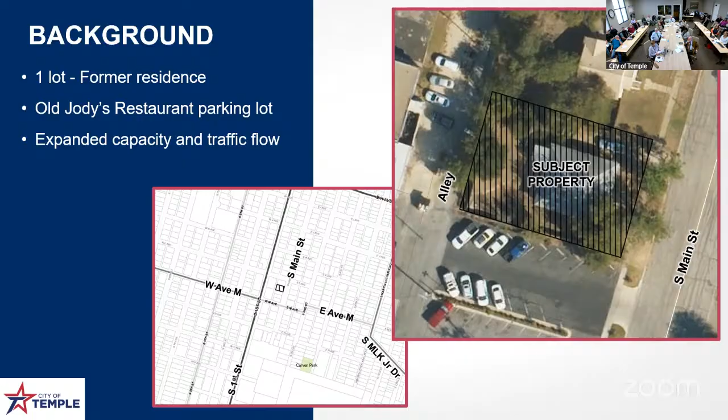They are planning to enhance their parking in this location. As you can see, the Old Jody's restaurant is to the left of the page, and all the parking is there. This will expand capacity. Currently they have 39 spaces. This will add an additional 15 spaces, so with restriping there will be a new total of 53 spaces.

They also show some internal circulation so people won't have to come out into the public roadway onto South Main Street. With the new parking area shown at the top of the screen, those green areas at the top and bottom are the landscape areas, which comply with the TMED standards as well as what they have been doing.

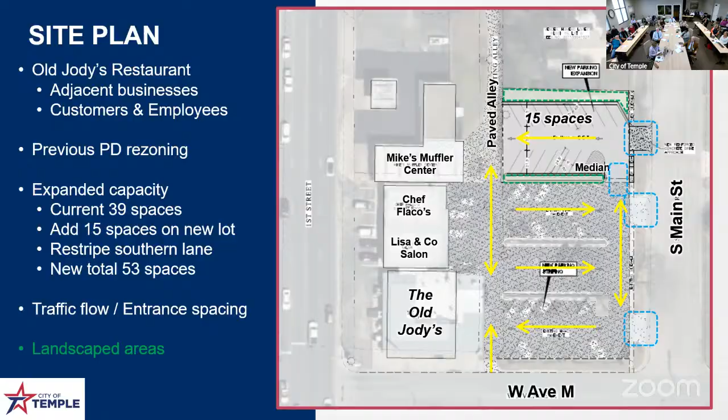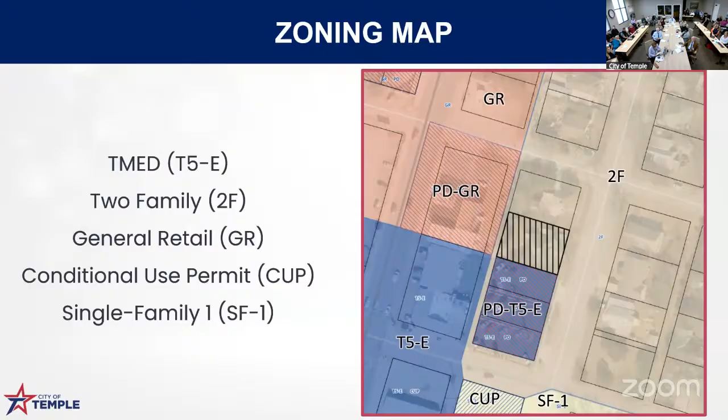Here is the zoning in the area. You currently have the TMED zoning for the parking, as well as the Old Jody's restaurant. You have PD general retail within this area, a conditional use permit, and some single family zones. This proposed zoning will be the exact same as what is directly south of it.

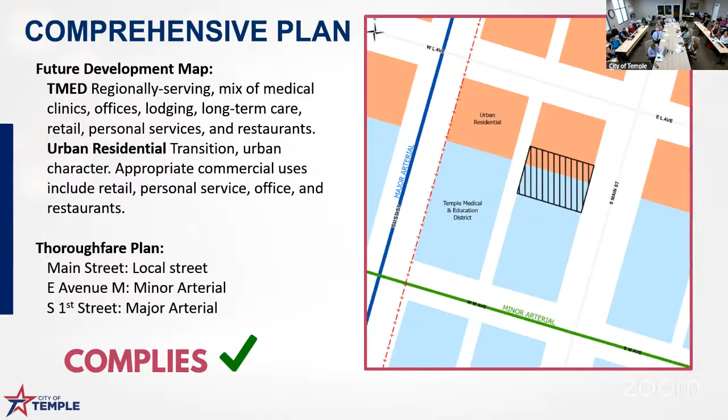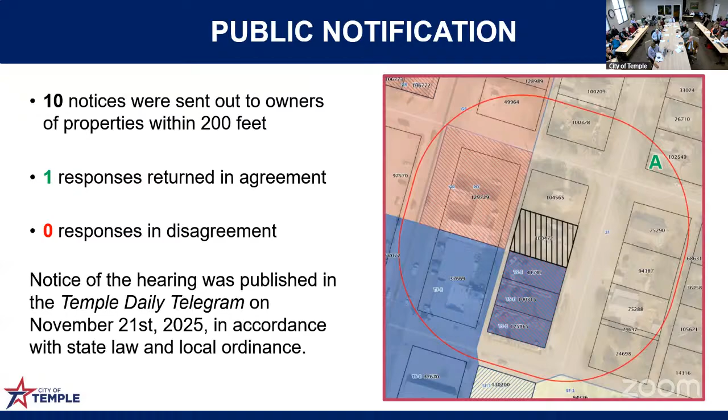Council? Good, thank you, ma'am.

Moving on to item 2 is to discuss the building concerns at Sammons Community Center and the Summit Recreation Center.

Good afternoon, everyone. To give you an update on the Sammons Community Center as to where we stand, this is a building that's currently closed. I want to give you an update as to where we're at with regards to moving forward. So just to give you a little history of this building, it was originally constructed back in 1921.

The blue dashed lines in the bottom half show the original structure. Since its construction in 1921, it was added on many times, and they basically left the original roofs as they added on to it. So there's a lot of weight on that building overall. In May of 2024, we had high winds hit our area, tornadoes, but not tornadic winds in this area per se, though it did damage the shingles on the roof.

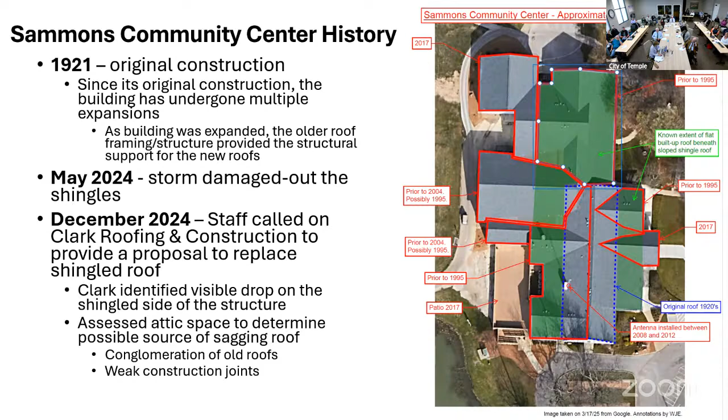So staff's response to this in January 2025 was we contacted Wiss, Janney, Elstner, referred to as WJE. They specialize in forensic engineering. They have a lot of PhDs, and they're the ones who do research to figure out why things happen, not necessarily designing new things, but why did things fail and so forth.

It took a little bit to get them engaged and on site because of our processes. But last March, we had a lot of high winds. So in talking with Kevin Beavers and others, we made a staff recommendation to close that facility until the structural assessment could be complete. WJE completed their assessment on site on March 17th, and when they left that day, they said, we agree with your assessment—this facility needs to stay closed until you can make the necessary repairs.

But we didn't receive their final report until May 13th, 2025. At that point I asked, can we engage you to design the improvements? But that's not their expertise, especially if we're talking about tearing off a roof and putting it back. They'll help make repairs, but not necessarily a major renovation to part of the building.

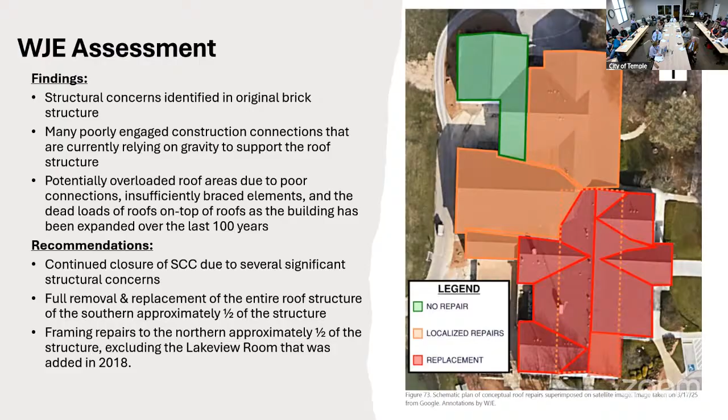Their recommendation was to continue closure of the center for safety reasons and structural concerns, and to fully remove and replace the entire roof structure on the south side, designated by the dark red portion on the bottom. That means opening the whole thing up, not just taking off shingles—you could look down inside that building. Then there are localized repairs needed in the orangey area at the top, and basically no repairs where you see the green, which was the latest addition we did back in 2018.

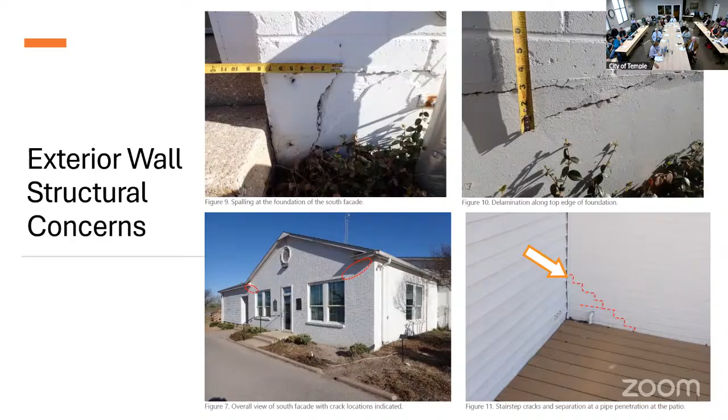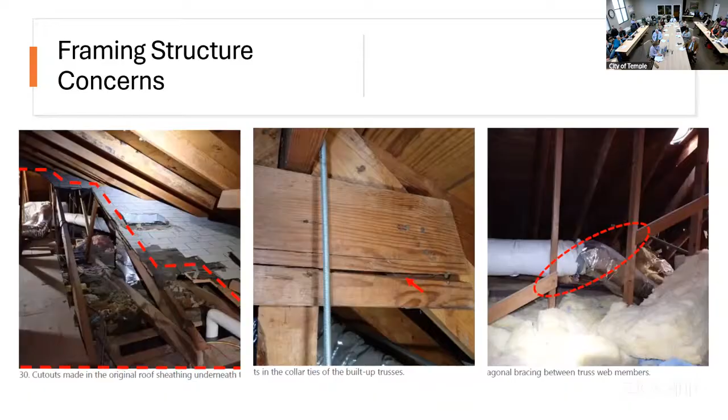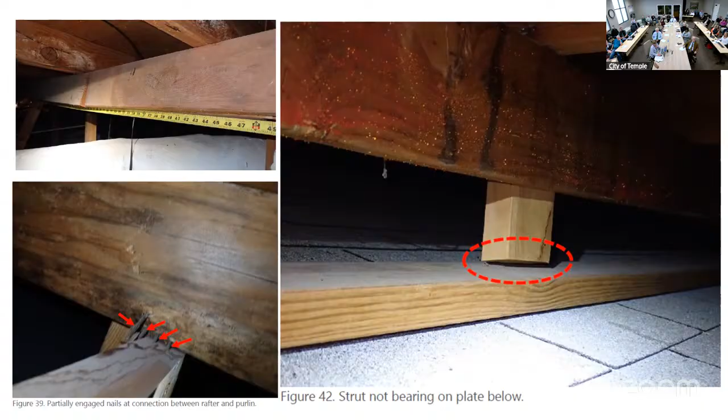Inside the attic space, this is just a sample of the issues they found—these are all signs of where we don't have adequate structural support in the roof structure. You can see in this picture where that board should be sitting flat down if you're going to have structural capacity there, and it's just not.

And looking back, you can see the multitude of issues—but in addition to the roof structure, when we talk about taking the roof off, we actually have HVAC components all intertwined in here, along with electrical lines, data lines, plumbing lines, and gas lines. All of that is intertwined in this building.

Our response to this was we talked to WJE, and they said give us a proposal for doing the repairs you're recommending, but that really isn't their specialty. So we contacted Garcia Architects to help us evaluate further. At first it was to do that, but they said, can we strategize here and take smaller steps rather than just assuming we can make this happen.

So they did a feasibility study for us based on getting another structural engineer involved. They actually had challenges trying to get a structural engineer on board, just because of the challenging nature of this project. Not everybody was jumping up and down, pick me, pick me. On August 18th, finally, we were able to issue a notice to proceed to Garcia for the feasibility study, which would also include opinions of probable cost as to what it would cost to repair the building versus rebuild it.

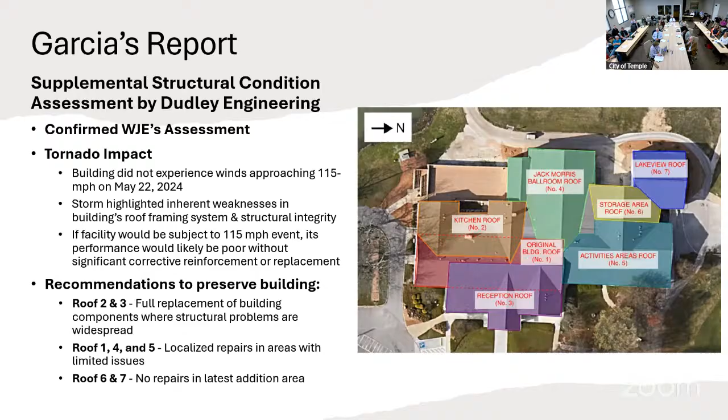The other thing they did is look further at the impact the tornado had on it. This building did not incur the tornadic winds, but they concluded that if it did, it would not perform well. All the same, when we've got 30 and 35-mile-per-hour winds in the city, it's concerning even at that level. Their recommendations were the same as under WJE's report.

On top of the roof issues, over the years I can recall staff saying they keep getting called out to Sammons Community Center for a sewer blockage and so forth. So thinking about that a little deeper, we wanted to understand what that issue really is. We scoped the wastewater line to find out why we're having to basically clean out the sewer lines, and ultimately what we found is a collapsed clay tile sewer line underneath the middle of the building.

Where you can see in blue, right in the middle, this is all clay sewer pipe. This is the south side, the bad roof. Going out onto the deck, we also have a bad line right there, all clay tile. With the green lines, we have restrooms in this facility in the upper right, and newer restrooms over here—those are all PVC lines and are okay, all clear, all good. But we actually have a full stoppage in the line right now, since we haven't been using it for several months.

So the option is, if we renovate this facility, we need to fix this at the same time. It won't be simple—the area we're going into is the area where we're just planning to do localized repairs. Really, to get the 4-foot wide swath we need to excavate and get that 4-foot deep line out of there, we need to go a little farther into a total removal of the roof system.

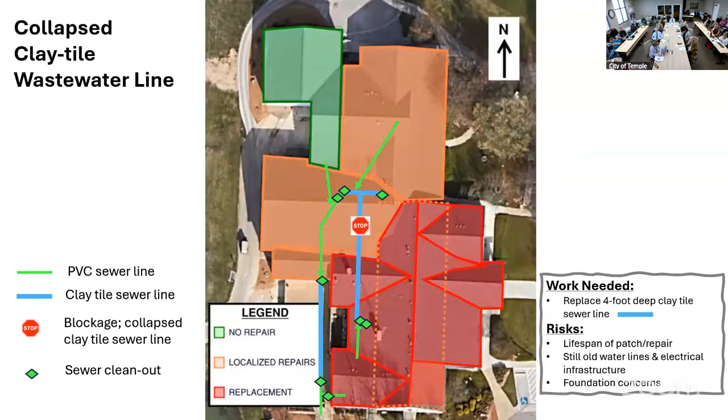The risk associated with that is just the lifespan of that repair. We can do the repair, but there's still old water lines in the building and foundation concerns in general. Another challenge with this building is electrical and mechanical—everything's intertwined into those roofing numbers—but the electrical system in this building does not meet code, so we would have to upgrade that as part of it if we renovate it.

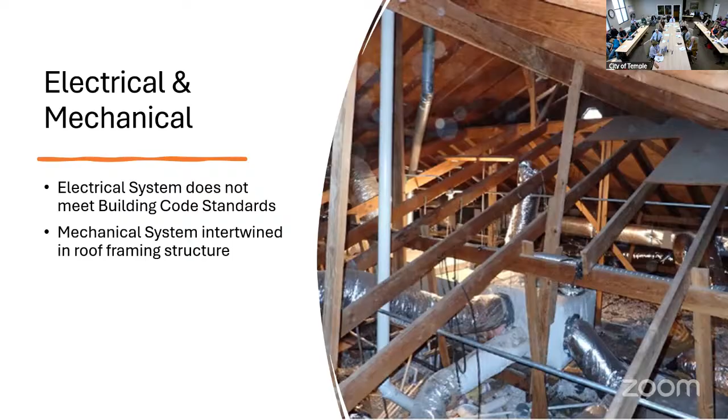So this is the update I wanted to provide you with today as to where we are with this. Bryn, did you have any comments you wanted to add with regards to it?

Thank you for that update, Belinda. We know the facility has been closed for several months and that there's a lot of concern, especially from patrons who rely on that center day to day. Council knows we've done our best to accommodate the programming that historically happened at the facility at other city facilities. But part of the importance of that facility is that it's the place to be for some of our older residents, so it's certainly a missing piece in the services we've historically provided.

And we know that there's a lot of concern and questions about when is the facility going to be available again. So we wanted to provide the update to share that there are some very significant challenges that are being faced. The building is certainly not just a simple kind of roof needs to be patched up or even the shingles replaced. It is significant and very widespread structural issues. And with a building that is at that age and has had that many iterations of remodels and expansions, it's just a very complicated project.

It's also complicated because the funding that's available to us to address the issue differs based on whether we're talking about a remodel or a rebuild of the facility. So we are not quite at the point that staff is ready to bring forward a final recommendation to you, but we know that the facility is being missed by many in our community, and so we wanted to provide an interim update and let you know we're working hard on it and we're working as quickly as we can to identify a feasible option to bring you so that we can get that asset back into the community.

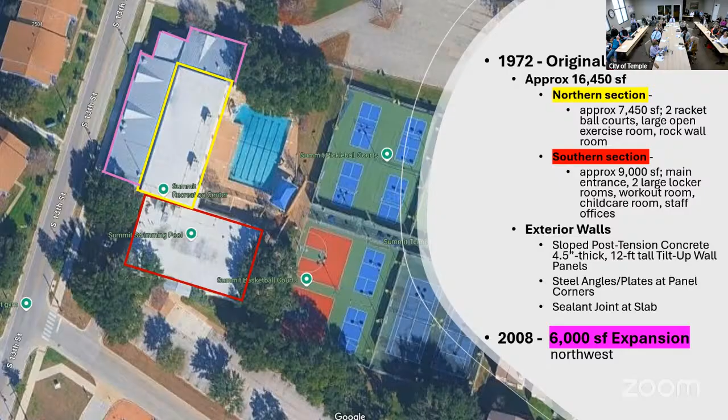So what's happened was, in October 2024, we were called over looking at the shower. We knew that we had some issues. You can see by the tile, it's probably the original 1970s tile. But we noticed how the tiles buckle, and we thought, well, we can fix that.

We've got a great tile guy now on our maintenance staff. So we went ahead and we actually could find the tile that we needed that would match and so forth, but it took us a while to get it in. So in February 2025, Elias is our tile guy, but he does so much more, very little in tiling. But anyway, he started tearing off that buckling tile, and lo and behold, what he found was this,

which is a root of some type of either tree, bush, or whatever, but it's basically growing up the walls of the shower. And there's a gap in between that shower wall and the outer wall that starts at like 14 inches. You can squeeze in there, probably 22, something like that. You can get in there. And then it just goes up like this to the wall of the shower, and then you've got the exterior wall this way. But ultimately, in the men's shower at least, this is what was happening.

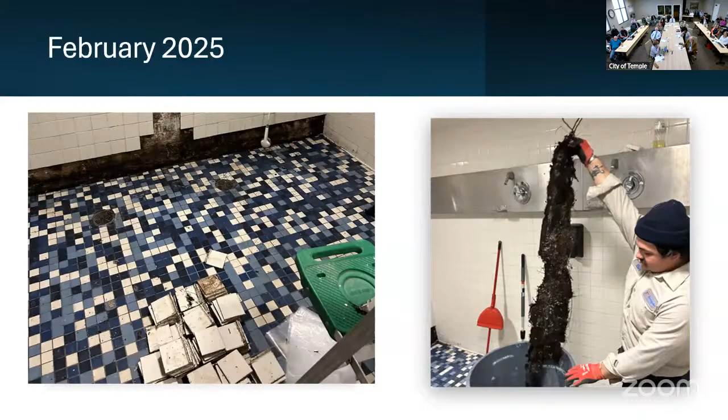And so what you see on the left is after he pulled that off, and what you see dark there is roots basically growing up there. So what's wrong? We went to our go-to for forensics to find out what is our problem, how do we fix it. WJE, we engaged them to assess the root issue.

Once they got in there and we actually opened up the wall, we found that basically the steel studs, the metal studs had all corroded away behind the shower wall. That's the reason that the tile wall was buckling. And so ultimately, the specialist in the water infiltration said, hey, I would need to get a structural engineer involved. So they came out then and did a structural assessment of it.

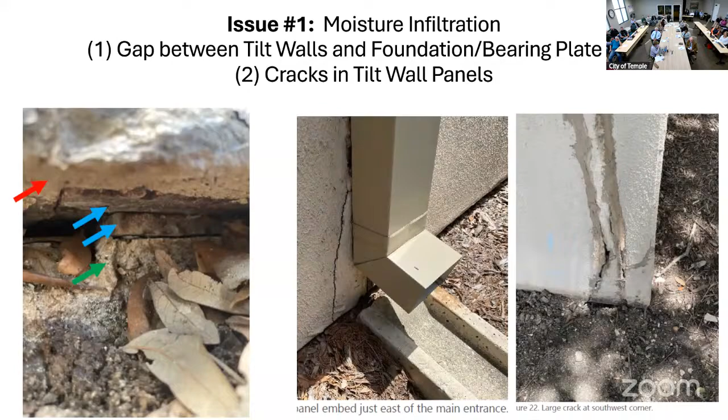I'm gonna outline then the issues that we found. So basically, there is a gap between the tilt wall and the foundation bearing plate, and there's cracks in the tilt wall too. So that's allowing moisture into the building, and yes, it was allowing the roots to grow, but it was also corroding away anything metal that it was touching. The effects of issue one, just as I've already shown you here, this is a metal stud where basically there's nothing left of it.

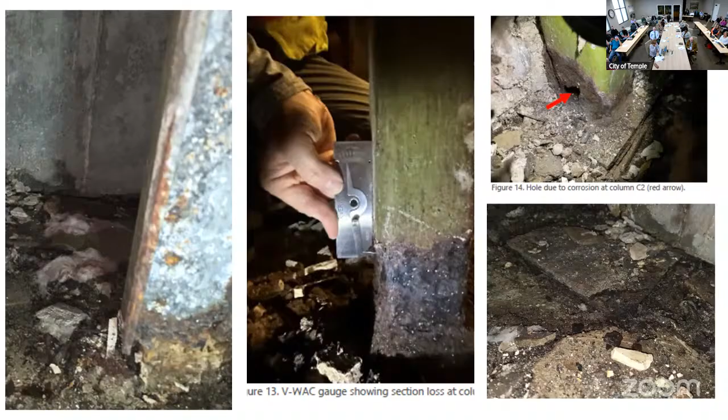The other thing that it did is there's columns, so the structural support for the building itself is structural columns, and so the moisture is also corroding away the steel columns, which is the main support for the building. And you can actually see in one of the columns where it had gone all the way through. And basically this is just a base of where the column sat.

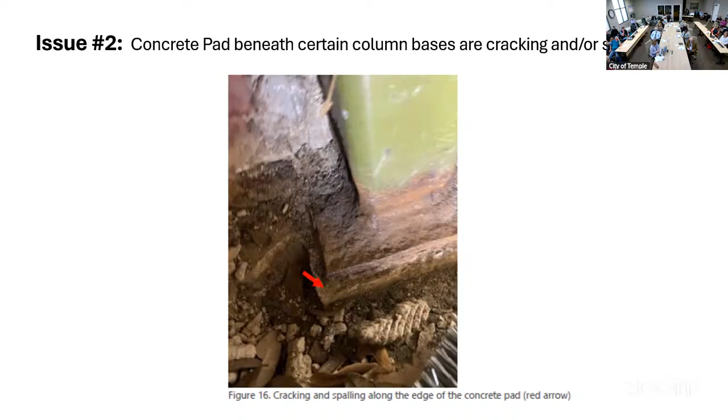Another issue was that at the column bases that I just referred to, the concrete pad beneath it is cracking and spalling in those spots too. So in addition to not having a good structural support with the metal column, you actually don't have a good base that the columns are sitting on. Issue 3, cracking and spalling around several of the post-tension anchors and steel in the walls itself. The strands that hold it together like rebar, they're becoming exposed, and that's not good either.

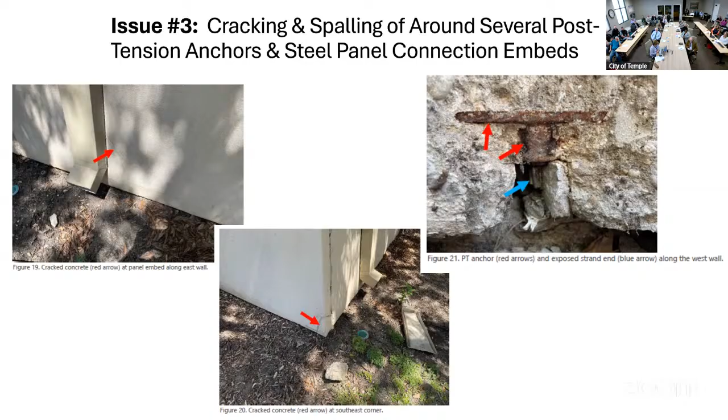So WJE did a structural analysis, and basically the ones they could get to were primarily just C1 and C2, as we call the columns, and this is the men's locker room. This is the shower that I was showing you the pictures of right there. C1, they said, its capacity right now is at 75%. We can't degrade too much more, or it's to the point where it's gonna fail. This column right here is worse. It's at 94% of its capacity.

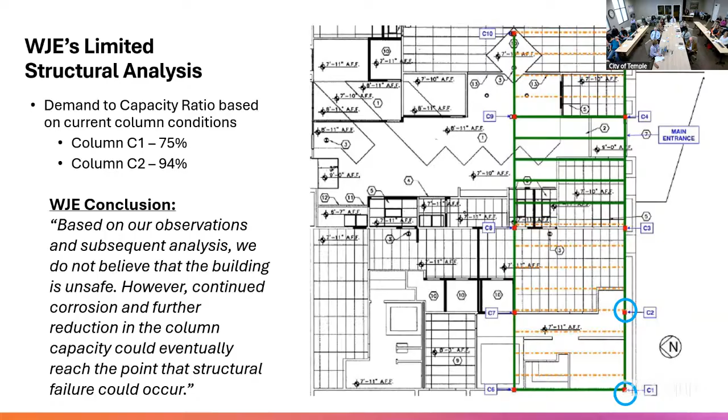So that's not good. But WJE's conclusion was: based on our observations and subsequent analysis, we do not believe that the building is unsafe. However, continued corrosion and further reduction in the column capacity could eventually reach the point that structural failure could occur. So we need to take care of it if we're going to continue using the building. So they recommended to us some priority repairs, that being, get these repairs done within a year.

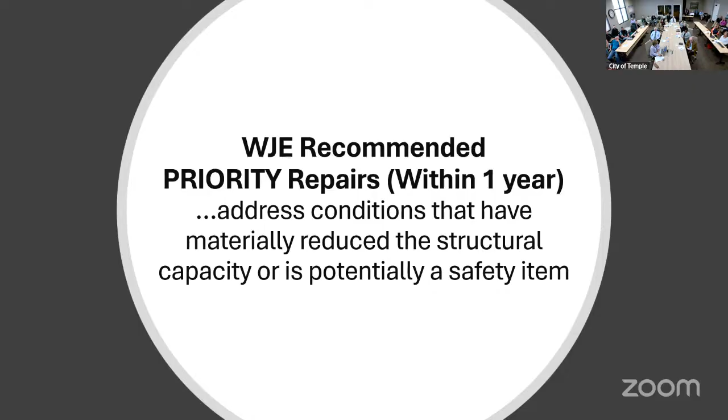The challenge in all of this is, yes, we can fix this and make it better for the short term at least, but they have to weld in a confined space in order to do this.

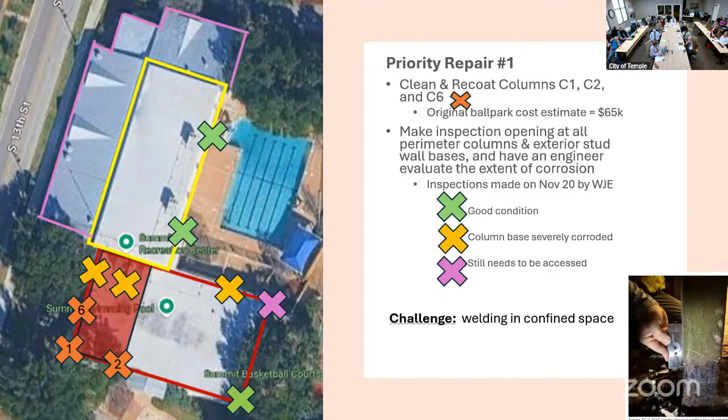Priority 2 is to just perform the concrete repairs we need to restore structural integrity to the bases, and stabilize the tilt wall panels where we're seeing spalling in them.

Priority repair number 4 is to inject cracks around the embed locations, basically fixing those tilt wall panels.

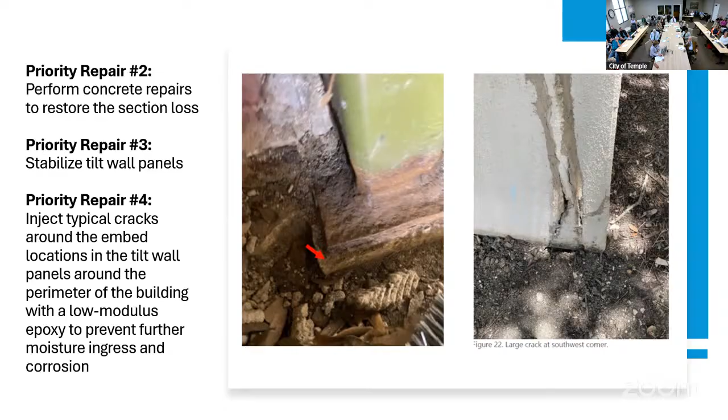And then of course, we need to get a good caulk joint in there between the foundation of the building and the tilt walls.

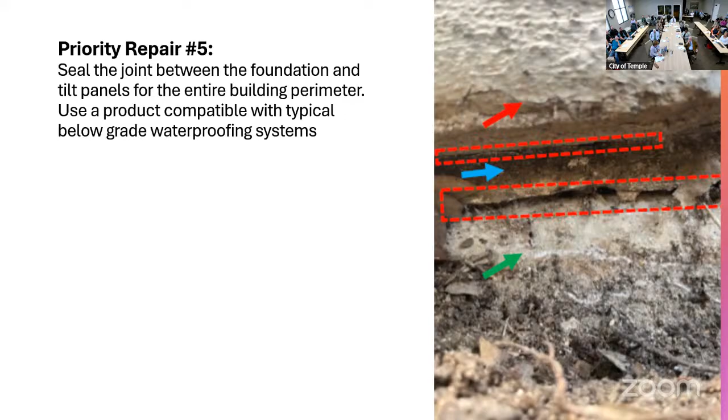Priority 6, after we've got that done, then we need to put everything back, because we're basically going to have to tear out the finishes in the men's locker room, the women's locker room, the hot tubs, two hot tubs, two saunas.

All of that in order to make the repairs we need to make, we're going to have to tear it all out and then put it all back.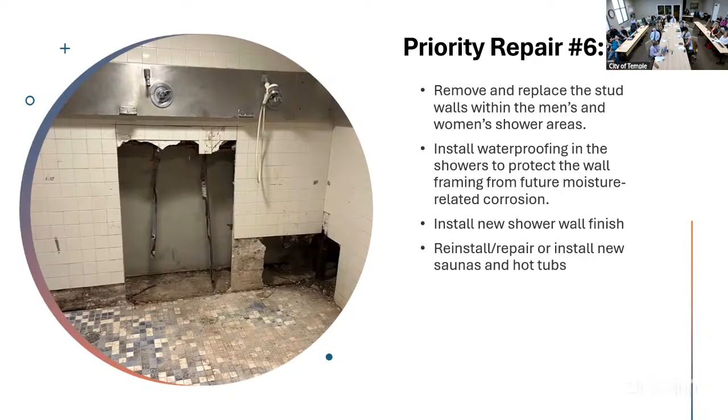Our proposed strategy, we already have WJE working on design of this, and we want to fulfill those short-term repairs based on your previous guidance.

When we originally reported to you that we thought the repairs would be $500,000, we don't have a great crystal ball, but based on what we found in our other openings, we think it's crept up. So we're thinking more like $750,000.

Our anticipated timeline is to finish the design by the end of February, basically award a contract to Clark Roofing for the repairs under a job order contract. Hopefully they can price it out in March and we can get the contract ordered.

Construction would be underway over the summer months when other outdoor facilities are open, and get the repairs complete by August.

Turning to Austin, he's probably looking at me like, Belinda, that's aggressive, but we think we can do it. Tony's shaking his head too. Tony Zavala, our facility services division director, agrees with that.

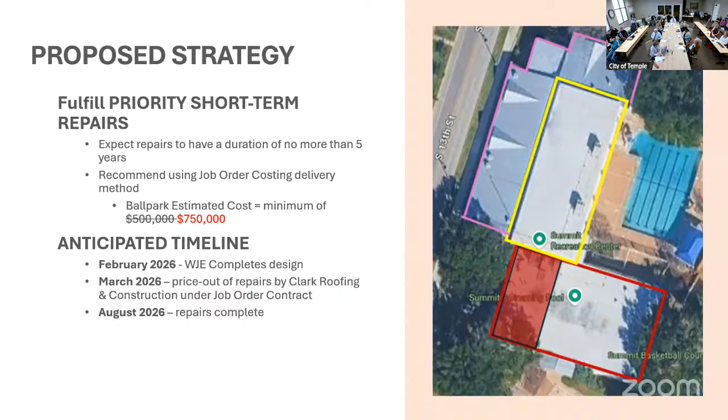With that, I'd be happy to answer any questions with regards to the summit.

You told us before about the restroom situation. The restrooms have not been impacted. As far as I know at this time, the only thing impacted is the shower facility—the men do not have a shower facility.

Well, five years is what you would hope to get out of that. But with structural instability as it is, and how it's heated up like that, if you go farther into it, it's hard for anybody to give you something accurate.

But that buys you five years to plan something new, yes sir, or not—I mean, make a further plan.

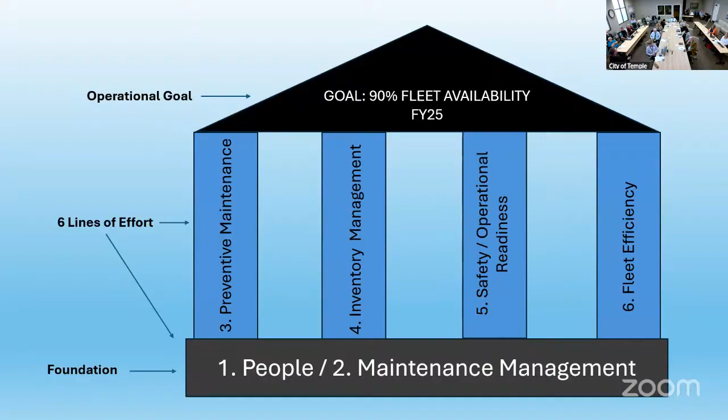All right, so the first line of effort and the key tasks that are involved - I won't go through each one, but I'll highlight the ones that are mainly important to us. One, as you saw with the personnel chart, task organization was really important to us. We wanted to make sure we manage our talents effectively.

When we notice that we have an employee who is maybe at the beginning of their career in this industry, we make sure that they're aligned with somebody who has that experience so they can bring them up to speed in a quicker fashion.

And then developing a deliberate onboarding plan where we don't just throw our technicians to the wolves. We have a 6-week process of them going from senior technicians and foremen and completing repairs that we know they're going to run into on their own. Once they've shown proficiency in those tasks, that's when we allow them to be assigned to their own original assets.

Maintenance management, again, the work order process is the biggest piece of that. Knowing that the work orders are in the correct status, we developed a deliberate process of how we open and close work orders to more efficiently make sure that the operator is completely aware as they're turning that equipment in and signing it in, who's working on their equipment, and we get accurate information from those operators firsthand, whether that be updating mileage or hours, and that's helped everything from an accurate preventive maintenance schedule to just decreasing the downtime of the repairs.

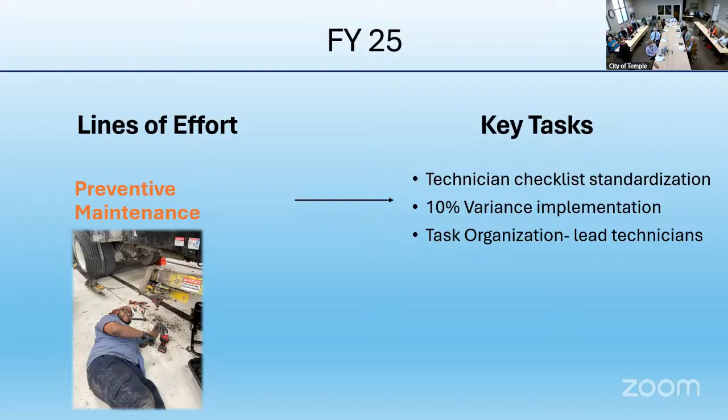Inventory management, I kind of hit on at the beginning. Parts ordering and procurement, one of the big issues we had when the heat started to pick up was PTOs. And PTOs are not the easiest things to get, right? We got to send them off to get rebuilt. Sometimes that's a week-long process. So for that example, we've procured a PTO of every manufacturer that we use. It stays in our inventory department to where when that asset comes in, that PTO is bad, and we determine we replace it, take that bad PTO, send it off to be rebuilt if possible.

Tim, I wonder if everybody around the table knows what PTO is. Yeah, okay, so power takeoff. You're talking about a power takeoff, which is what runs the hydraulics. All right, so I apologize for using acronyms, it's just in my blood from the military, but the motor makes the arm work. Yes, sure. It makes all the hydraulic functioning for those refuse trucks and whatever work. Thank you.

So this line of effort covers our operational readiness, and this is probably one of the bigger ones to me. So what we've done is we've augmented a solid waste technician every morning at their pre-trips. Right now it's Ken Moyer, but we've seen that pay off pretty quickly, where the quick repairs can happen, or that technician can tell that operator, hey, make sure you're double checking this, or this needs grease. Let's get that done before it gets out on the road.

After that pre-trip inspection is done, we have a rotating calendar, and we pull in a random asset from solid waste every 3 days a week, where we get 6 PPI inspections, precision pre-inspections, done. That's where after their operators have done their inspection, we bring it up, and Jason Reisner and his technician that we assign to him goes through it a little bit more thorough, just to make sure that there's nothing missed. We have found plenty of things that has probably stopped major repairs from happening.

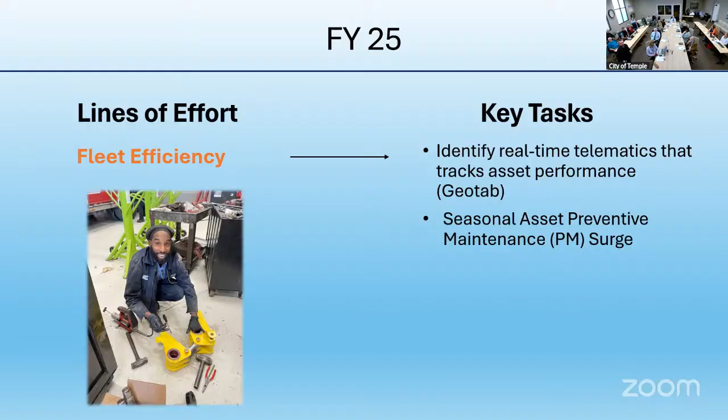Do we have whole trucks that are snow trucks, or are they just bodies? Yeah, we have two, well, salt trucks I guess, sand trucks, yes sir. They're actually inserts that just go inside the curtain. Okay, that's what I was asking. We don't have trucks just sitting there once every two years.

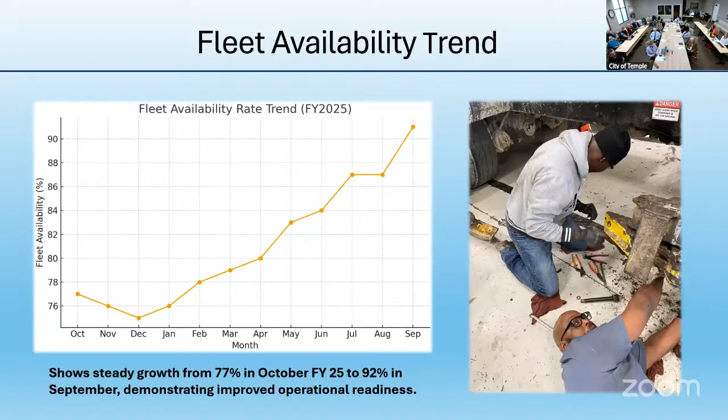So this graph depicts our fleet availability trend from October, when Mr. Peter came on, and February when I did, and kind of where those adjustments we've implemented over the last couple of months, most of them from about July or June, have helped us increase our availability. Obviously there's a significant difference between departments, in how much they might be available compared to a department that doesn't get used as much. But it is a successful story to go from a 77% rate to a 92% rate in that amount of time.

And then this is where our goal is for fiscal year 26, same lines of effort, same key tasks that we want to continue to move forward with. But with the amount of growth we've seen on that last slide for fleet availability, our goal is set a little higher this time, to try and hit 95%.

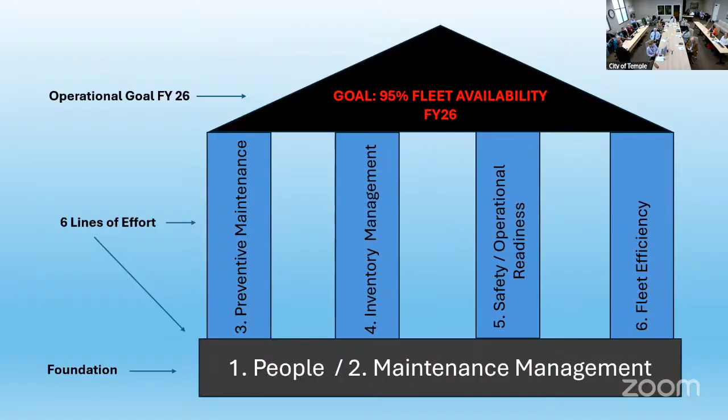So here are some of those key tasks we want to get after for fiscal year 26, which will be the split shifts, which Brendan hinted on at the beginning of the brief, where we'll have that PM shift from 11 to 8 PM. And then enhancing our technician training — during the budget period, we did request enough finances to get two training periods every year for a technician, which is a huge advantage.

We actually have Jason Reisner going to the EDT training in March of 2026, and we just certified two CNG technicians. Outsourcing those kinds of things was very costly, so we anticipate being able to curb that portion of the budget in the very near future. And then again, with the Geotab and faster integration, we're trying to get these systems to talk, or at a minimum get Geotab to talk to fleet, so we know what faults are popping up on those vehicles sooner rather than later.

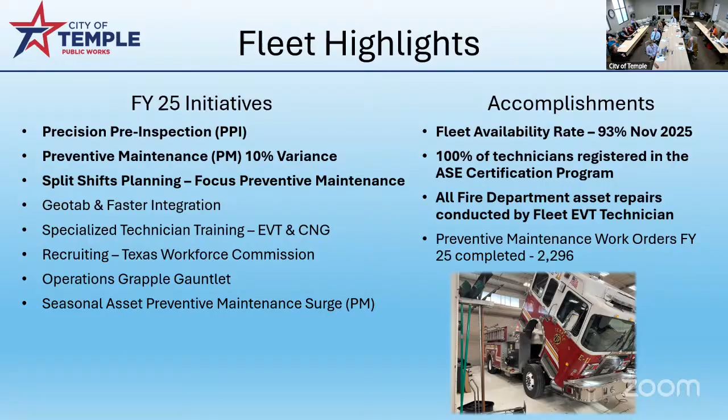So here are the highlights. Again, the 25 initiatives — the top 3 involved with the PPI program, the 10% variance program, and the split shift planning. And then the accomplishment: we hit an overall 93% fleet availability in November. We have 100% of our technicians registered for the ASE certification program and are ongoing studying. And all fire department assets, with the addition of Kaylee Heath, are beginning to come in and start getting repaired in-house.

Do you anticipate all of them, or how do you plan to get those back in house? Well, working with Kirby over the last couple of weeks, we've begun to start the process. As of right now, since Kaylee's been on board, we haven't had to outsource anything. It is a bit of a learning curve, because we have to figure out what the common failing parts are and everything that Siddons-Martin was preparing — we're going through invoices for the last year to figure out what they were doing, so we know what we need to stock. As well as resourcing Kaylee with the appropriate tools, because obviously you need a completely different set of tools and resources than for a trash truck or something.

Because they were doing a lot of preventative maintenance too. They were doing PMs, but Kaylee, in the last two weeks, has already done three PMs on the fire trucks.

Pending any other questions? That was it.

Looking for the report, I've seen a few, so I hope their department's running as well as that report shows. I think it's getting some shape here. Yeah, I'm excited — over the next 90 days or so, there'll be significant improvement in our operation.

But I'm wondering what divisions there are within fleet, right? There's solid waste trucks, emergency vehicles, et cetera. Is there a division within all of fleet that is struggling as far as availability? Currently, our front end trucks in solid waste, and our solid waste roll-off trucks are in need of attention.

Meaning it's not enough, or they're worn out? They're worn out, and we're trying to get them all ready. Some new ones are breaking down, old ones are breaking down. So in general, for fleet, you have two major splits: the heavy duty side and the light duty side. Heavy duty is your solid waste trucks, fire engines and trucks, heavy metal equipment, dump trucks, backhoes, things like that. Light duty is your passenger style vehicles, mowers, weed eaters, police vehicles.

And then, of course, in each of those, you've got your solid waste fleet, you've got your emergency. So I think you're asking more about how the operational customer side is struggling, if there's an area that is struggling more.

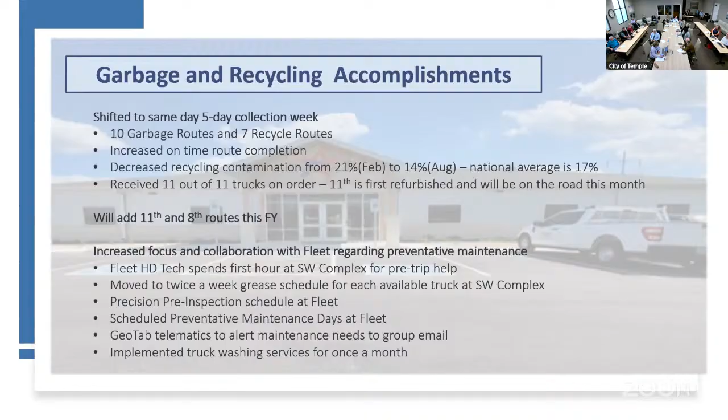Brush and bulk. We'll talk about that a little bit. I know y'all probably have some questions on it. As you know, we moved to once a month brush and once a month bulk for each home. We schedule on a weekly basis, and we've always finished the scheduled collections that people have requested. And I want to thank Heather Mikulas and the customer care teams. They have kind of taken the lead. Obviously they take all the requests and they help us with the building of the routes, daily, actually. We stay up with it almost daily.

We gave every house in town a door hanger. So I actually learned today, Brent did not get one. I need to call this out. She did not get a door hanger. And so I asked my staff, I'm like, y'all bring me the maps. I don't think I did either. Really? Okay. That's my wife. I didn't. You did? All right.

As y'all know, we used a temporary agency to hang the door hangers. My staff gave them maps. The temporary workers would go out with the door hangers and the maps, and they would bring us back the highlighted maps. Brent, I brought your map in. Your street was not highlighted, and that's my bad. They actually went all the way around your whole neighborhood, but did not do your street. They thought Brent would spread the word. Yeah. That's okay. I know what to do.

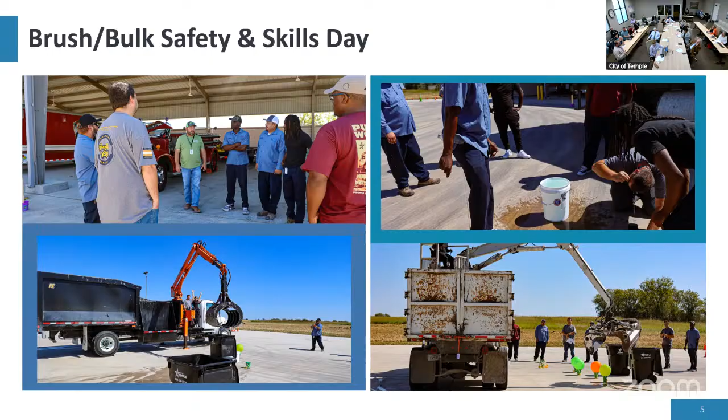So safety and skills, kind of goes to the guys not digging up the yard, because they have to use that grapple. We don't want to dig holes in the yard. So we kind of put some skills and fun things together for this group. That's great. Yeah. The top right was a bucket of water, picking up that bucket of water and not crushing the bucket either.

So we had our HHW event in October. We had a new record this year, 697 cars. It was a good day, and we changed the hours this year. We used to be 9 to 2, we went to 8 to 1. At 8 o'clock, I'll show you a picture here in a second, we were lined up and we were honestly done at like 12:30. So it was awesome. Good.

And then, with the change to brush and bulk, we're doing a spring bulk drop-off event for residents. It's the first one we're gonna do, April 18th, where people can just bring all their bulk stuff out to the solid waste complex for free. And if they don't wanna put it on their yard and request a pickup, they can just bring it to us and we'll take care of it.

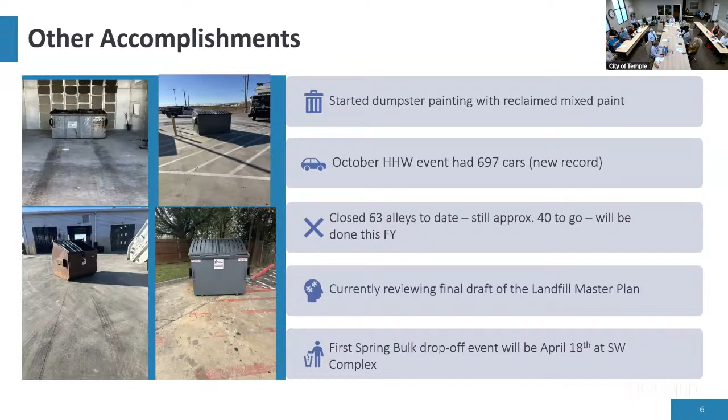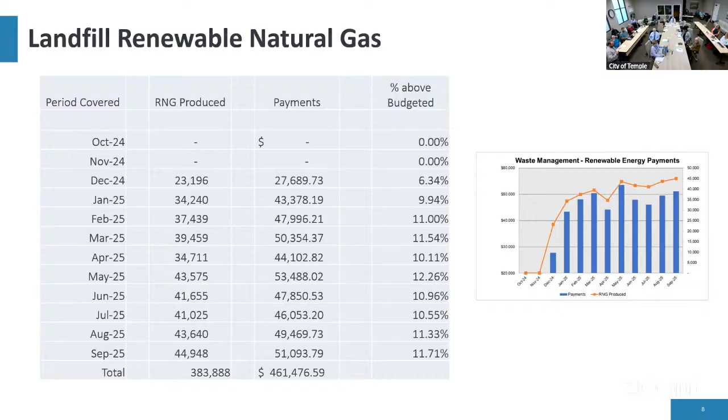Do we have an escalation on the percentage, like after year 5? We do, we're currently getting 4% of the proceeds, and then after year 4, I think, it goes up to 7%. So in 3 more years, we should see an increase just on the percentage we're getting. Nearly double. Yes, it should double.

Next 6 months, obviously Christmas time, we're gonna do Christmas tree recycling and our grease recycle drop off for cooking. And then I talked about implementing the 11th garbage and 8th recycle route. We're gonna have a spring shred event March 28th, and then April 18th is gonna be that bulk drop off day. We are gonna implement the second commercial side load route when that truck gets here.

We're gonna finalize the landfill master plan, and then we're also looking at starting construction on the new recycle drop-off center that's gonna be across from the solid waste complex. We're gonna have a 24/7 recycle center there, outside of our compound fence that closes. And we're also gonna add some additional parking for our heavy duty trucks and employee parking to keep up with the growth.

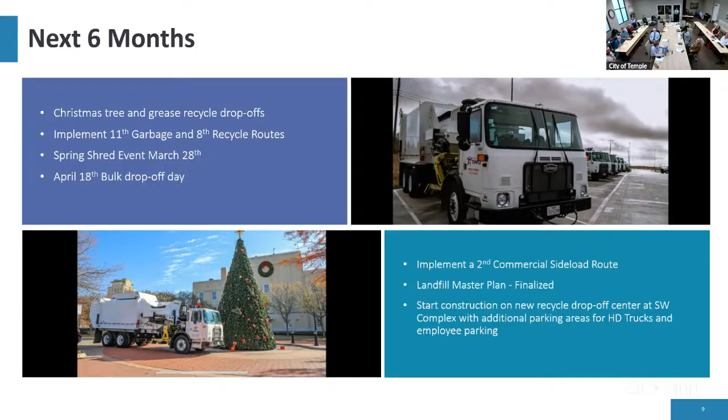Happy to answer any questions.

Can you talk about the new drop off? Do we still have the glass over by Dover? Yes sir, we do. And we're gonna have a second one at the new drop off there, so it's kind of east side and then centrally located. Maybe one day we'll go west.

It's all good news. Thank you. I appreciate it.

Mine's gonna be pretty short. I didn't put this together because it was supposed to be last week, and I was having a grandbaby, so... or my last one, so having one.

These are some of our accomplishments. We're gonna get into some other stuff. We completed our slurry seal and resurfacing program. For a year, we started our annual overlay. We're doing some today, but they're gonna shut off after today. Mike knows this, the asphalt plant stops for Christmas, they don't come.

Hey, is what's on, what was put on Wildfire Drive, is that still seal? No, asphalt.

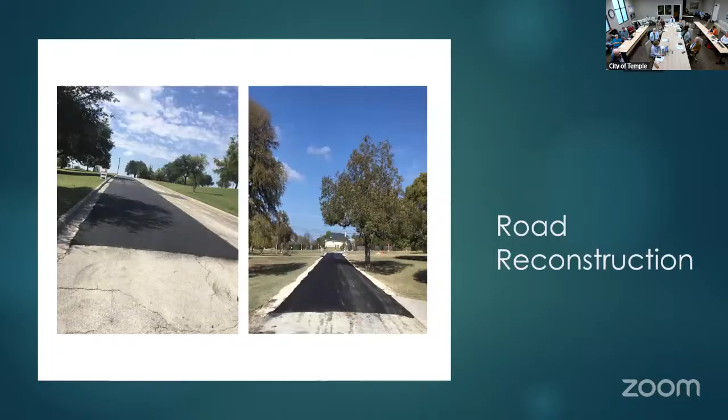But this is just a road, I didn't really know this. And this is a sidewalk that we put in, it's temporary. But we noticed, I talked to Dr. Ott, these kids from the subdivision were really walking on the edge of a 45-mile-an-hour road in a ditch to get to school because they suspended the busing in the neighborhood. It was less than a mile, so we had to do something. So we threw in a little 4-foot sidewalk for them to get from their subdivision to a crossing guard, then cross the road at the ditch.

Yeah, when we expand this will go.

How many people are on that sidewalk crew? Four, it's been that way all along. Are y'all backed up? Oh yes, got plenty of work, about 20 years. Okay, that's all.

Hey, y'all were gonna add another crew, right? Yeah, it's in the business plan, yes. That means council has to approve it. It's in the business plan. I hope we already approved it. We have one, it's not, it's in the business plan in terms of... it is not, it's FY 26. The only thing we approved in FY 26 was the fleet, firefighters, solid waste, assistant city manager, and some engineers. So everything else got deferred.

And then as you recall, we're asking... I think it's today's agenda for the transportation user fee, which will help us assess potential revenue sources for future needs, including the 6 additional crews we talked about in Kenny's area, which was concrete crew, additional reconstruction crew, patch crew, alley crew, tree trimming crew, and pavement marking crew. And the study would also evaluate our drainage fee, which would be separate, but would address the other part of his department, which would be potential additional drainage maintenance funds.

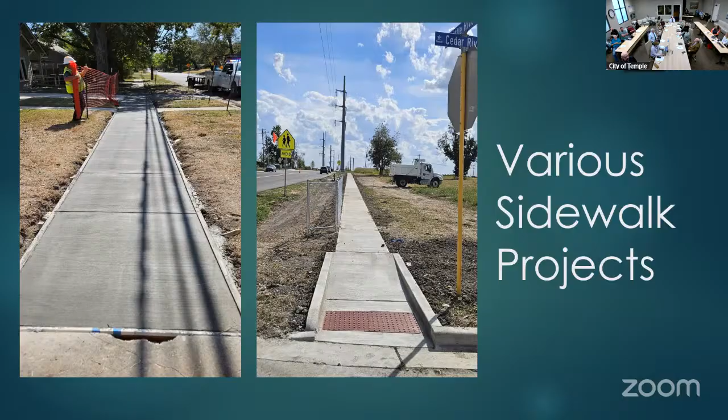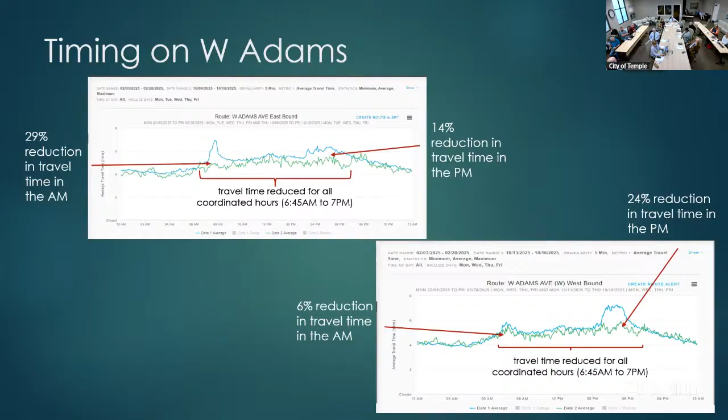And these are big numbers. This is, in my career, the biggest bang for the buck. Thank you, Barry. It really is.

One of the things, we've had numerous cities, and I wanted to get a list for you, but I think we've had 3 or 4 so far come in and look at our operation. I know Victoria was one of them, and we've actually got a call from Corpus Christi to come up and look at it. So we're having people come and see how we're doing and see the setup.

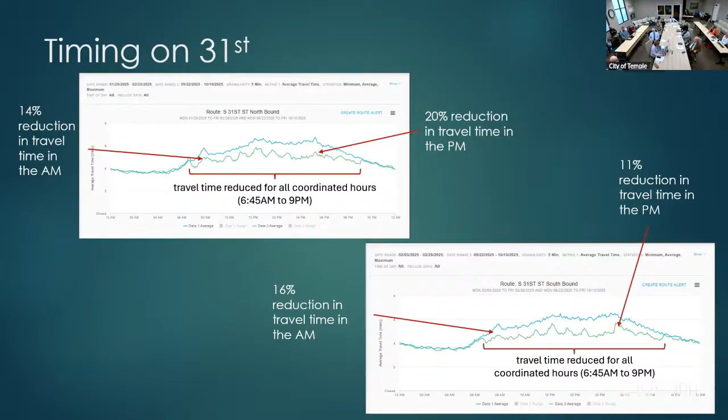These are just some of the new guys. Everybody's talking about a career ladder. After COVID, we were desolate - there were times I think we got down to less than 50%. It was all about operators; we could not hire an operator for what the pay was, especially experienced ones.

So we did a career ladder, and it really gives us a chance to go out and hire. We got 3 ex-TxDOT employees, a couple contractors, and 2 county employees to work for the city, all thanks to that career ladder. We can hire them at a wage competitive with or more than what they made, based on their years of experience. So it really worked for us.